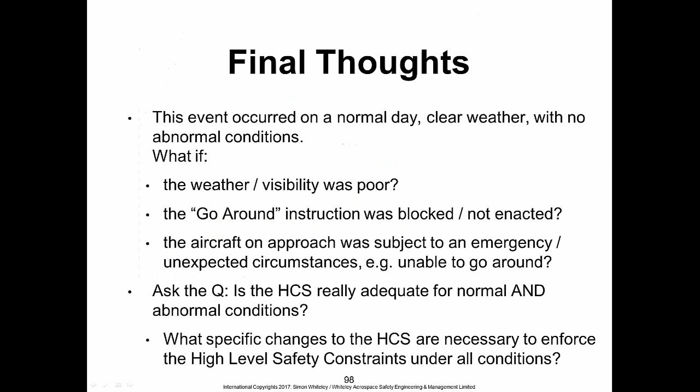One of the standard mitigations is that the aircrew will have a watching brief on the radios, because if they can hear somebody talking on the radio, that gives them a mental model, situational awareness of what's going on around them. Now, we do know that there was a 20-second delay before the aircraft captain receiving the radio frequency for the runway controller. So potentially in that 20-second window, the runway controller was talking to PH-SOL and G-LEAA missed the opportunity because of that delayed control action.

Now, it may be also that during the period that they were on the frequency with the runway controller, the runway controller was dealing with other aircraft and PH-SOL had already been given the clearance. Or it may be something else going on the flight deck that the aircrew just didn't hear it, for example. That is always one of the aspects. And that's why one of the recommendations is to establish what the sequence of these events were in terms of the ground controller sending the instruction to change frequencies to G-LEAA's captain, and then when the PH-SOL aircraft received the clearance to land.

Okay, so let's have a look. Does a ground controller ever give permission to flight captains to enter a runway? Doesn't the pilot know that only the runway controller gives that permission? Joanna, that is a cracking question. So does a ground controller ever give permission to captains to enter a runway, and doesn't the pilot know that only the runway controller gives the permission? That's a very good question. So there's two aspects to that.

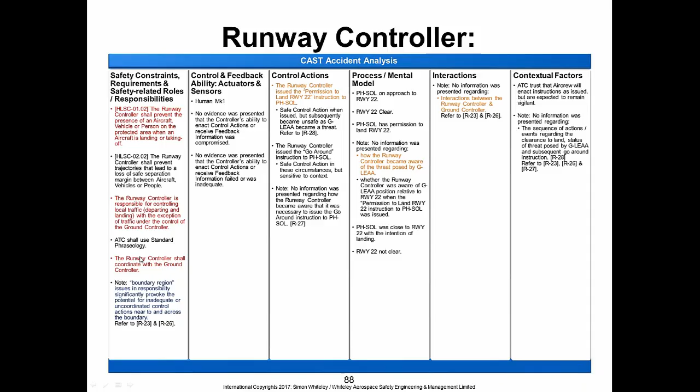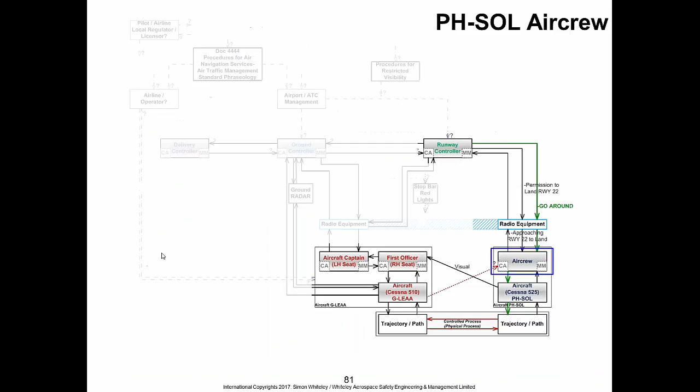So in the case of some of these safety responsibilities, obviously I've inferred some of these. Let's go back to the pilot one. So, where is it? PH-SOL, no, G-LEAA aircrew. Okay, so in the case of the captain of G-LEAA, I've inferred that they must have some kind of responsibilities associated with operating and commanding the aircraft. Now, it may be that there's some specific things in there that I've missed that really need to be in there and considered.

And picking up on that, are the aircrew required to use standard phraseology from document 4444? Because if they're not required to do that, then that suggests that the ICAO documents are not fit for purpose. Or if they are required, then why didn't the airline or operator feed that information into the pilots? You know, so there are questions there.

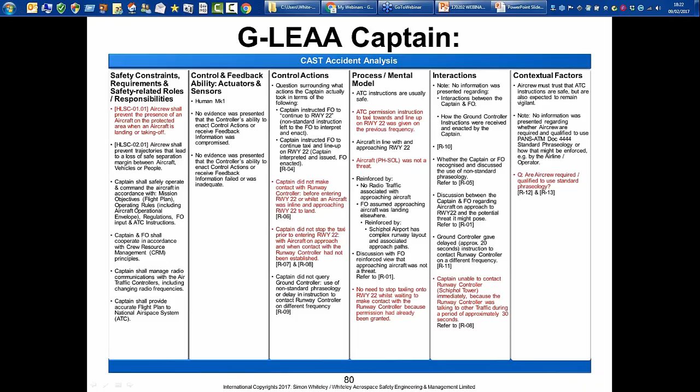So in answer to your question about how much training is needed, I would say you only need a basic introduction to STAMP course, and then it's really about practicing with examples, because that's it, practice. "In the States, all standard control and pilot terminology is printed by the FAA, no deviation is allowed." Excellent. So if this was an American FAA covered investigation report, it would be interesting to know a bit more about why the pilots didn't behave appropriately.

Okay, so feedback. "Really like the HCS element of the CAST analysis and how efficient it can be in terms of integrating the various controls." Thanks, Mark. "Good observation. Swiss cheese or layers of safety can easily be displayed like the stop bar used in low visibility, but as you demonstrated, the interaction, who controls it, can affect its effectiveness. This is a feature that the bow tie would not display as efficiently as CAST." That's a brilliant observation, Mark. Thank you for highlighting that.

So let's have a look. On this control structure, I haven't modelled the interactions with the stop bar lights. I've just put some arrows with a question mark. And that's because there is not enough information in the source material to tell me how that important mitigation fits into the system. So as Mark has kindly pointed out, if I did a bow tie analysis of this and I was a runway safety manager or whoever, and my bow tie analysis says we've got some stop bar red lights, that might look like a valid mitigation, but clearly in this scenario it's not.

And in this scenario, the reason for that is because the procedures for using the stop bar red lights stipulated that they should only be used during restricted visibility. And clearly there's a mitigation there that could have benefited a day when the visibility was not restricted. So let me just pick up what Mark said. So where is it?

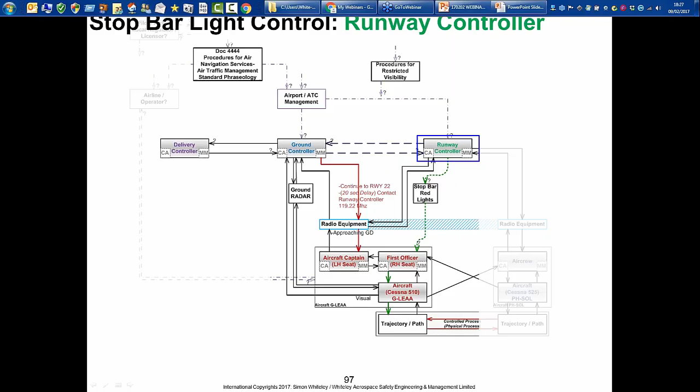Now, once you've documented the control structure, if you've got a real system with real data about how many times the ground controller makes a mistake or how many times we've had a runway incursion or whatever that data is, you could actually overlay that data on these different parts of the control structure and identify which of those parts is causing you the most trouble.

And then you can direct your spend on your safety budget, for example. So if there are issues with people not staying on the right frequency, you could use this as an insight into that aspect.

Okay, good stuff. Yeah, I think your ideas about the lights under the control of the runway controller is genius. Okay, well thanks, Joanna, I really appreciate that.

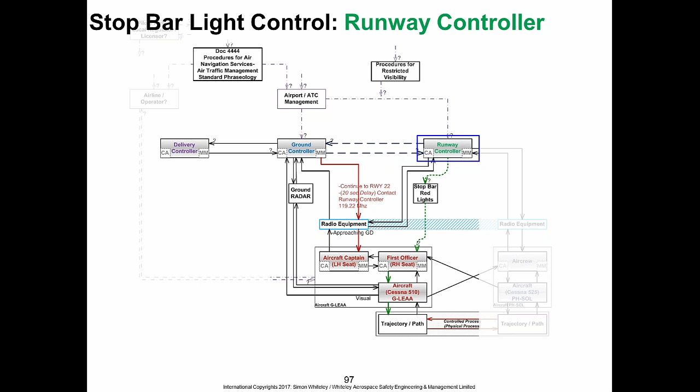Even at busy airports at slow times, sometimes the duties are combined. However, here I will be most interested also in the cockpit communications between the captain and the first officer. Yeah, you're absolutely right, Shem. That is a key bit of information that's not included. So, where is it? Not this one. Right, okay, so there's a couple there.

So, recommendation 10, investigate the interactions between and the behaviour of the captain and the ground controller with regards to how the ground controller's instructions came to be enacted by the captain, and then investigate the interactions between and the behaviour of the captain and the first officer with regards to how the ground controller's instructions came to be enacted. So was there some kind of dynamic going on there?

Was there something lost in translation? Was there something else going on? So yeah, you're absolutely right. Okay, Jenny, so thank you.

I don't see the hierarchy of controls is followed for this. Interaction by the airport, eliminate the interaction. Are separate runways for in and out not possible? This task is reliant on communication, awareness and following standard operating procedure, all low on the hierarchy of safety. Controls are expected to be partially ineffective, hence their position on the hierarchy of safety. Jenny, that is a cracking observation.

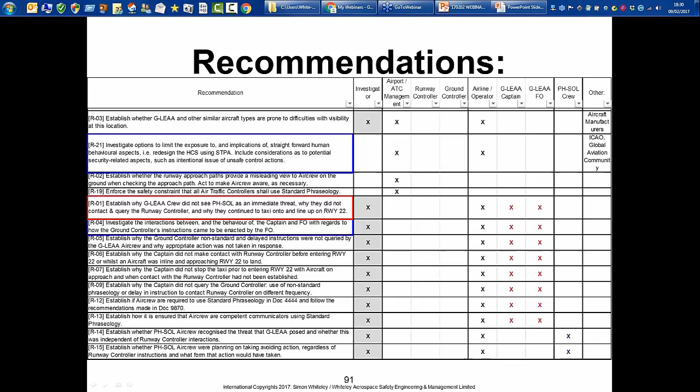Absolutely. So, what we've done here is we've made explicit the hierarchical control structure. And once you see it in its boxes and arrows form, you can start to understand how robust some of those mitigations, some of those controls actually are. And one example I gave was radio equipment. Now, at a quiet airport, so long as the radio works fine and there's no issues with interference and people standing on the transmitting button, then it should be fine.

But when you start to scale up the amount of traffic, the number of communications that need to happen, the length and complexity of the communications, that part of the control structure starts to look a little bit flimsy. And by making the control structure explicit like this, it allows everybody to see whether the control structure is actually robust or not. And then you can start to ask questions about the design of it.

Well, is it really appropriate for a complicated, busy airport to be using radio communications with its inherent weaknesses for such a safety critical operation? If we're really serious about runway incursion and preventing another Tenerife, then should we really be operating in this way with these technologies? On the railway, you would say no chance. We're going to have a level crossing with some barriers, some lights, bells and whistles.

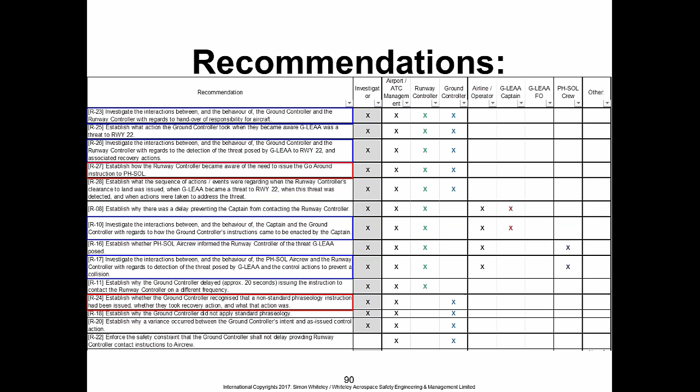How effective do you think CAST would be for malicious accidents in a security incident? Yes, Roger, another brilliant question. Right, okay. I'm glad somebody's asked that. That's brilliant. Okay. So this control structure.

We said earlier on that the ground controller issued an unsafe control action, but we don't know whether they knew that they did that and then took action, or whether they were oblivious and just carried on. So we need to investigate that. Now, we know, because the incident occurred, that this control structure was not sufficient to prevent it.

Now, if we look at the security aspects, if we had a ground controller that issued the unsafe control action consciously, how would we be able to tell the difference? And more importantly, how would we have recovered? Because in this incident, we don't know why the control action was issued like that, but we know the result was a runway incursion.

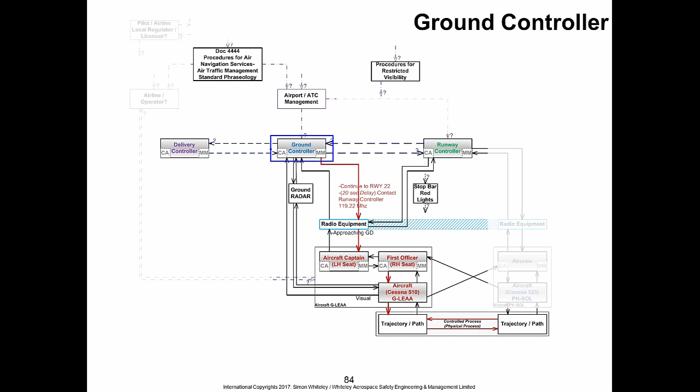So using this method, we can look at both sides of that. Is it a conscious thing, criminal intent perhaps? Or was it just one of those things humans do? Now, picking up a bit more about security, you'll notice that the radio communications are a critical part of preventing this accident.

If the go-around command had not been sent or received by the aircrew of PH-SOL, then they may well have carried on and landed on top of this aircraft. We don't know the geometry. We don't know whether PH-SOL knew that that aircraft was a threat, because that wasn't investigated, or it wasn't documented, should I say.

But if that radio transmission was blocked, whether it was malicious or not, or even somebody got on the radio frequency and started spouting commands in proper standard phraseology, how would we know? How would the ATC management or ATC controllers know that that was malicious and prevent it? Do we have those secure features?

So, to round that up, using this method, it doesn't matter whether we're looking at safety or security or cybersecurity. It allows us to see the functional issues that exist and gives us an insight into what we can do to resolve them. So it doesn't matter if it's safety or security. But yes, that's a really good question. I like that. Right, so let's have a look.

Next one. Hi, Mark, again. Incident-related question. Oh, I talked about that.

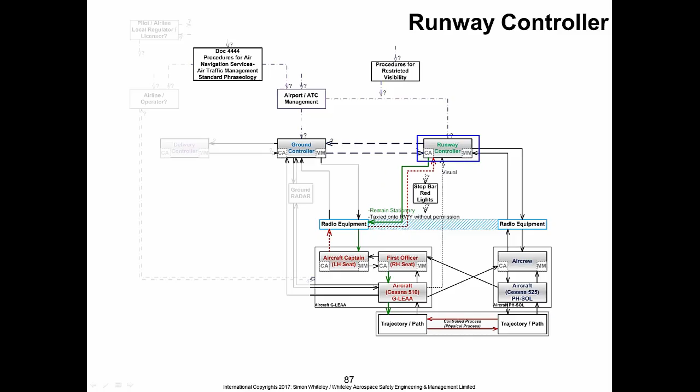I've got to go, but this has been really useful, and I shall take it back to the office and pass on the knowledge to the team. Great, thanks. That's exactly what I want.

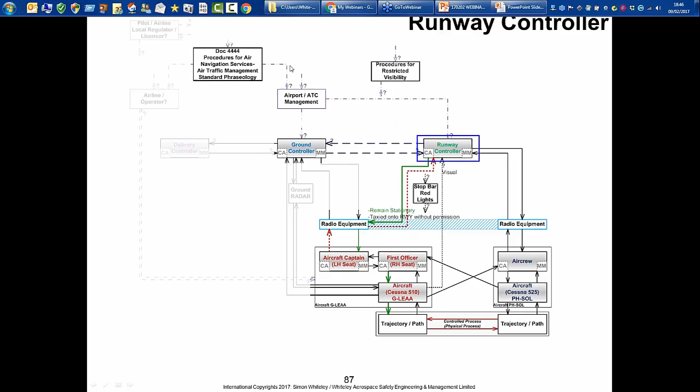If stop bars were present at every airport, along with runway status lights systems such as are in place at Paris and a few other airports around the world. Well, that's from a control structure perspective. So we're talking about airport ATC management and the layers above that. So let me just jump to another picture of the control structure. So here's one I made earlier, as they say in Blue Peter. Right, where is it? There, not that one.

Now, from an ICAO perspective, if there is a standard airport equipment fit that says your airport shall have these things fitted, one of those standard fit things might be, as Shem pointed out, stop bars and runway status lights. Now, if you're airport management and you have not implemented those mitigations, then you might be forced to do it, or it might be optional, and you might ask, well, what's our risk budget? Do we want to spend money on that?

If you draw the control structure with and without, that will show you what the potential causes of an accident would be and how much benefit getting those things fitted would provide. And I would argue that if the ICAO are not mandating a standard equipment fit across airports, then airport management should be taking the lead, because it's only a matter of time before their airport suffers a runway incursion, and potentially a serious one.